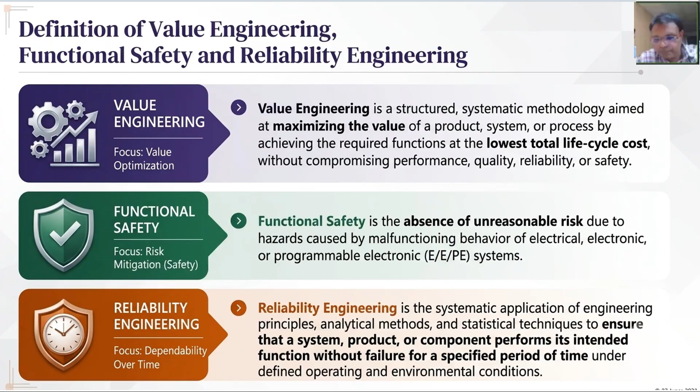When we are doing the development phase, we start with the low value, then medium value, then we provide a high value, and then we are also looking at providing some additional features to the high value, where we are also going to increase the function further. At the same time, the cost also gets increased.

And finally, we are also looking into the way where we can achieve the ideal value. It is nothing but having very high function with a very low cost. So this is the ultimate objective which the company is looking into, because the customer wants low cost with maximum function. And the value is defined as the ratio between function by cost.

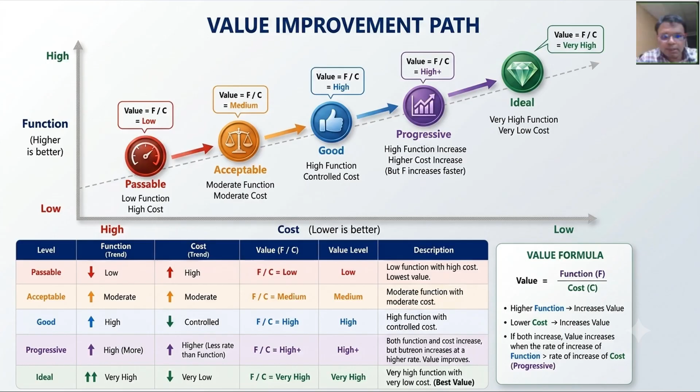And next comes the good value, having a high implication, where you have a high function with controlled cost. And in terms of progressive, cost is also increasing, function is also increasing, but the rate of increase of function is higher than the rate of increase of the cost. And the last is the ideal situation, where the function is very high and the cost is very low. And you can see the graph starting from passable to ideal. And this is the value improvement path and the path towards the electric vehicle.

And as I was mentioning, the correlation is very important between value, functional safety, and reliability engineering. Value is defined as the ratio between function by cost. Function is nothing but the performance, and performance is also directly proportional to function. And as I was mentioning, the quality over time is reliability. So again, this is also correlated. Reliability and quality are also correlated. And reliability is also defined as performance of our function over time. Again, it is correlated towards value.

And one aspect is functional safety, which we need to talk about now. As I was telling, functional safety starts with a function, then leading to the failure, and then how that failure can be avoided through technical safety requirements, analyzing the safety goal, safety mechanisms, and then HARA, which is nothing but hazard analysis and risk assessment. So I told you that the key aspect of value engineering, functional safety, and reliability is function. Okay, so to achieve the function is the very important aspect in all the three things.

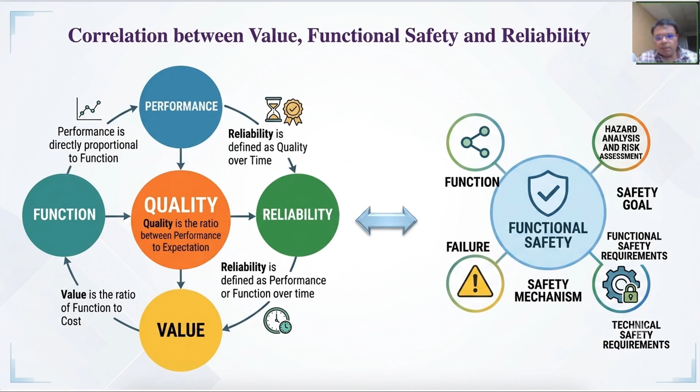In this slide, I'm going to talk about the importance of reliability and then functional safety in the electric vehicle. See, this is the pie chart which shows the percentage of failures happening in an electric vehicle, for which we need to ensure that reliability is a very important aspect. So that's where the importance of reliability comes into picture here. And on the right side, you can see the percentage in terms of different parameters or different verticals being mentioned. That's where functional safety is very important from the electric vehicle point of view. Let us first explain the reliability importance.

You can see here the failures of 100%. In that, 25% of the failures are happening with respect to charging infrastructure. 20% of failures are happening because of environmental stress. 15% of failures are happening because of power electronics. 10% are failing because of service issues, and 30% of the failures are happening because of battery degradation. That's why it's very important that we maximize the uptime and performance, reduce the life cycle cost, enhance the durability and customer satisfaction, and have long-term value and brand trust. That's why the importance of reliability comes into picture here.

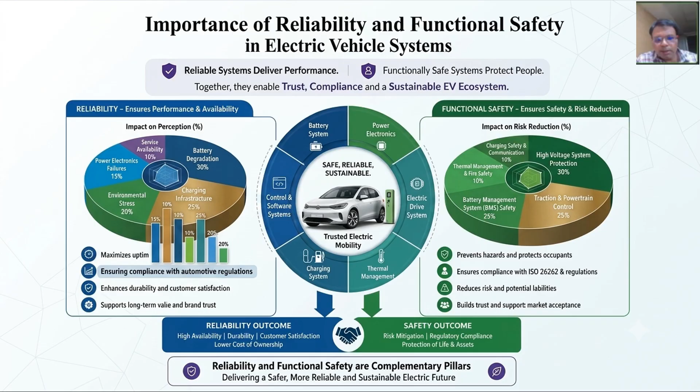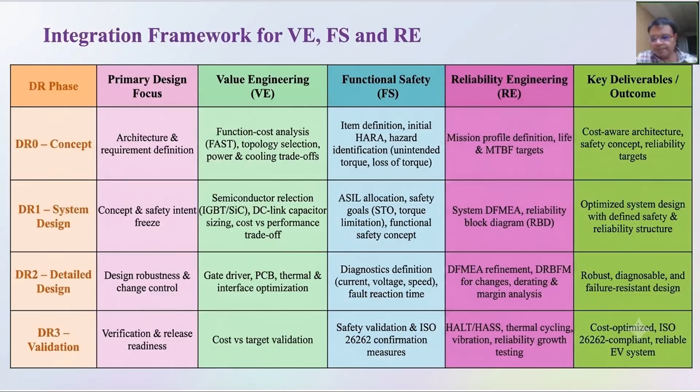Okay, so why is integration of all these three important? Because it addresses cost, safety, and durability together. It is not in isolation, and it also helps us to avoid conflicting design decisions between cost reduction and risk mitigation. It ensures the right level of redundancy, where both safety and reliability demand it. And as I was mentioning, the balancing is very important, where it balances performance, reliability, safety, and affordability.

And it also predicts real world failures and degradation using mission profiles and physics of failure mechanisms. And it also helps us to ensure safe system behavior under fault and limit conditions. And it helps us to reduce field failure downtime and warranty cost, because if field failures are higher, then the warranty cost will go higher, and the brand reputation also goes down for the company.

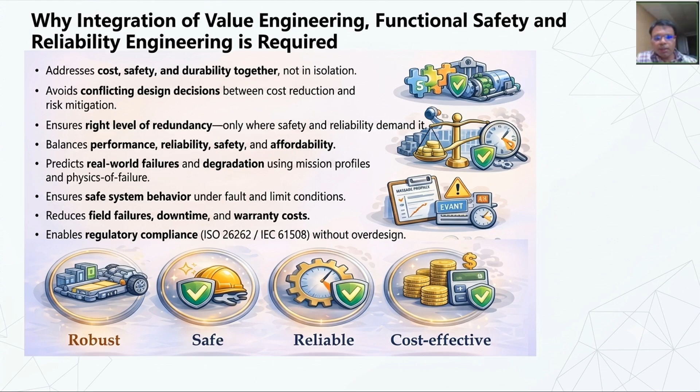And also this integration will help us to enable regulatory compliance with respect to the standards without going for over design, which will also cost more. When you're going for over design, cost is also involved. So the integration helps to have a robust, safe, reliable, and cost effective EV system.

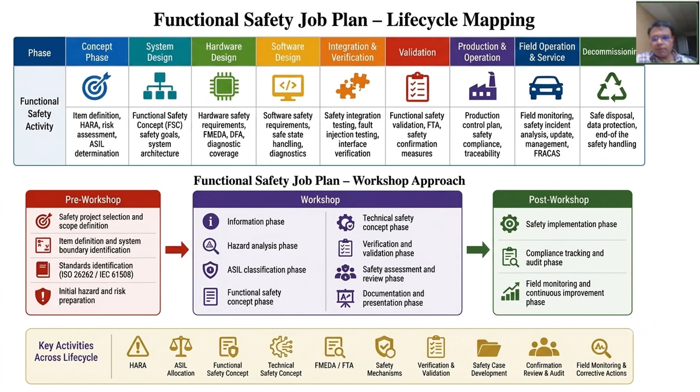And these are all the key milestones, like HARA, ASIL allocation, FSC, TSC, FMEDA, safety mechanisms, V&V, safety case development, confirmation, and then field monitoring.

And with respect to reliability engineering, again, we have various activities. First is the concept phase, where we start the reliability requirements and then the allocations. Then in system design, we go for a RBD, reliability block diagram, function analysis. Hardware design, we go for a DFMEA, physics of failure, derating. In the case of software design, we go for fault handling and diagnostics. Validation, we go for HALT and stress testing. And in production, we'll be doing the highly accelerated stress screening test, and then statistical process control. HALT stands for highly accelerated life test. We have the graph which we will show down the line.

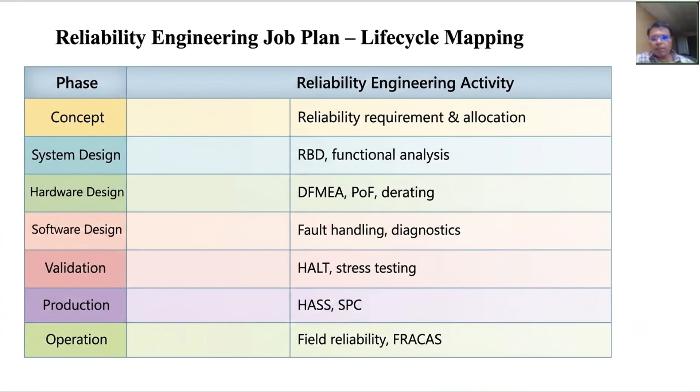And the final stage is the operation stage, where we do the field reliability and then FRACAS, which is nothing but failure reporting, analysis, and corrective action system. If there is any field failure, we need to take the corrective action. That's where this FRACAS comes into the picture.

Okay. So everyone is talking about failure, and what is this? How is the failure going to happen? See, error leading to fault, fault leading to failure, failure leading to hazard, hazard leading to the risk safety issue. It is not that every error will lead to fault, and every fault will lead to failure, every failure will lead to hazard, and every hazard will lead to safety issue. So what we need to have is the different stages, as I was mentioning, DR0, 1, 2, 3, where we analyze the function in a detailed way to ensure that the failure is not going to happen. It's not just we are going to stop only up to failure.

We are also going to the level of the functional safety aspects, where we are ensuring that even if the failure happens, it will not lead to hazard. So we are going to have the primary safety mechanism, secondary safety mechanism, safe state transition, and then redundancy for the design to ensure that hazard is not going to happen, and that it is also not leading to the safety issue. So we are going to cover all those things with one example for a motor control unit.

And it's not just we follow the design alone while achieving the system design for reliability with respect to the three aspects. We also follow the process. We follow the APQP process, and we follow the PPAP process to ensure that all the test cases are documented and verified, and acceptance criteria are taken into consideration. Against the same test condition, we are also going to test to ensure that functional safety is achieved, reliability is achieved, and in such a way the overall value to the product is achieved. So first we are achieving the value for a product. Next we are achieving the overall value for the electric vehicle.

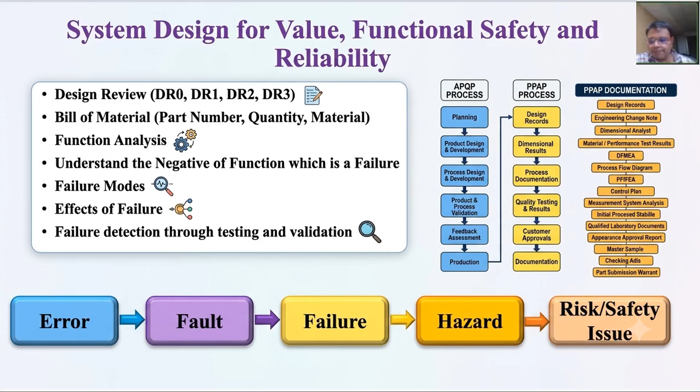And when I'm designing the system, we look into two aspects. One is series reliability, another one is parallel reliability. Say for example, series reliability is if we have the battery, inverter, and motor. If all these are in series, all the components must work together to achieve the function. If battery fails, or if inverter fails, or even if motor fails, if any one fails, then the vehicle cannot move. That's where the challenges of reliability come with respect to the series point of view.

Another example is the battery cells in one string. If the cells are in series, then all the cells must function together to maintain the voltage. If any failure happens in one cell, then it will affect all the other cells also. Say for example, in a battery system having 96 cells in series, if any one cell is failing, then it will affect the complete EV battery pack. That's why the overall reliability for a series system is going to be lower.

Say for example, R1 for battery, R2 for inverter, and R3 for motor. If the individual reliability is 0.9, then 0.9 into 0.9 into 0.9 is not going to be 0.9 overall. It's going to be 0.7 something. Which means the reliability gets reduced.

In order to have better reliability, we also opt for parallel reliability where, say for example, if I'm considering the reliability as 0.9, then 1 minus (1 minus 0.9) into (1 minus 0.9), so the reliability will be higher than 0.9. So the reliability is much higher in the case of parallel reliability when compared to series reliability.

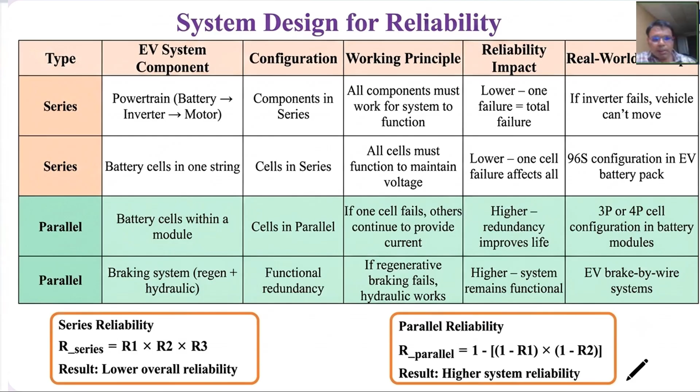So in short, reliability is less for series reliability and more for parallel reliability. You need the complete system to work for a series, whereas here, even if one works, it will not affect the performance.

As I was talking about ASIL, which is nothing but automotive safety integrity level, we have 4 levels: ASIL A, ASIL B, ASIL C and ASIL D. It starts with lowest severity, moderately low severity, moderately high severity, and then highest severity. It is the product of exposure into severity into controllability, E into S into C. That will give us ASIL A, B, C, and D.

So what is exposure? Exposure is the probability of occurrence of the fault in the system, where E1 is very low possibility of occurrence, E2 is low possibility of occurrence, E3 is medium possibility, and E4 is high possibility.

Severity is the intensity of the damage and its impact on the vehicle and the occupants. So you have light injuries, slight injuries, severe injuries, and life-threatening incidents: S0, S1, S2, and S3. And lastly, controllability is the ease of controlling the vehicle by the driver in case of fault or malfunction. You have C1, C2, and C3, where C1 is easy to control, C2 is moderately difficult to control, and C3 is very difficult to control.

Now, this is the table where you have exposure, severity, and controllability. ASIL D is the highest one, with the highest severity. ASIL D is C3 into S3 into E4. C3 is difficult to control, E4 is high possibility of occurrence, and S3 is life-threatening incident. So it comes under the ASIL D category. I'm going to give one example with respect to the motor control unit in the next slide for ASIL C and ASIL D, so you will understand that.

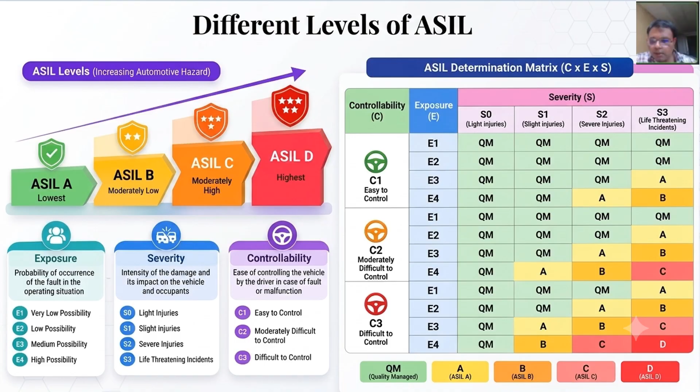ASIL C is again life-threatening incidents, or it can also be severe injury. Here it is a product of C3 into E3 into S3, or C3 into E4 into S2. Let me give an example so that you will understand.

So this is an example of a motor control unit where we start with a function. I'm taking two functions. One function is monitoring the motor control unit temperature and protecting against overheating. And next, we are analyzing the DFMEA for this, where over temperature is not detected, leading to thermal stress. This is the failure mode. And the vehicle level HARA is sudden loss of propulsion or smoke generation. The safety goal is to prevent the unsafe motor control unit thermal condition. So here it's coming under ASIL C category.

And for this safety goal and for this ASIL C category, we need to start with the functional safety requirement, where the motor control unit shall continuously monitor the MOSFET temperature, going into a derating condition above the threshold. And we go for the TSR requirements, and we have the primary safety mechanisms, secondary safety mechanisms, safe transition states, and also the redundancy aspects. So, for example, when you're talking about the safe transition, we go for a controlled power reduction and then the safe motor shutdown. And in the case of redundancy, we go for dual temperature sensing and then the independent hardware thermal cutoff.

And again, one more function for ASIL D for a motor control unit is to control motor torque and vehicle acceleration. So here you see the failure mode is unintended high torque, which is leading to sudden acceleration. So when the vehicle is getting accelerated suddenly, what happens? It will lead to the hazard where the control of the vehicle will be lost, leading to a severe collision, right? So that is the reason it is coming under ASIL D category. And the goal here is to ensure that we are preventing unintended acceleration in all operating conditions. So we have the FSR to safely disable the driver output during the fault.

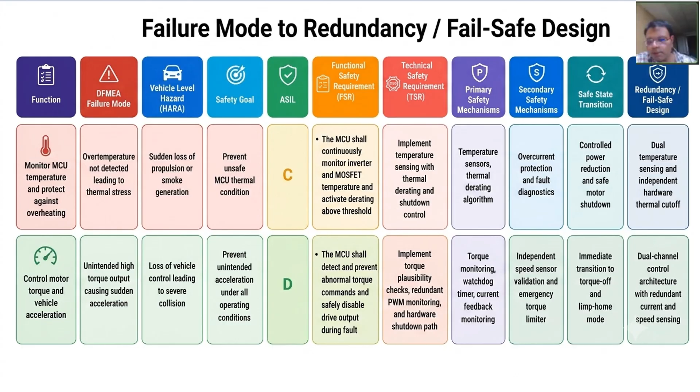And in the case of TSR, technical safety requirements, we are going to have the PWM monitoring system, hardware shutdown path system, and we have the safety mechanism where we go for a watchdog timer, and we have the secondary safety mechanisms where we have the independent speed sensor and the emergency torque limiter. Finally, we are going for a safe transition where we go for STO and then limp home mode, where we ensure that the fault is being diagnosed and the fault will not happen. And we are also ensuring the fail-safe design: even if the failure happens, it will not lead to the hazard. We have the dual control channel architecture with redundant systems with respect to current and speed.